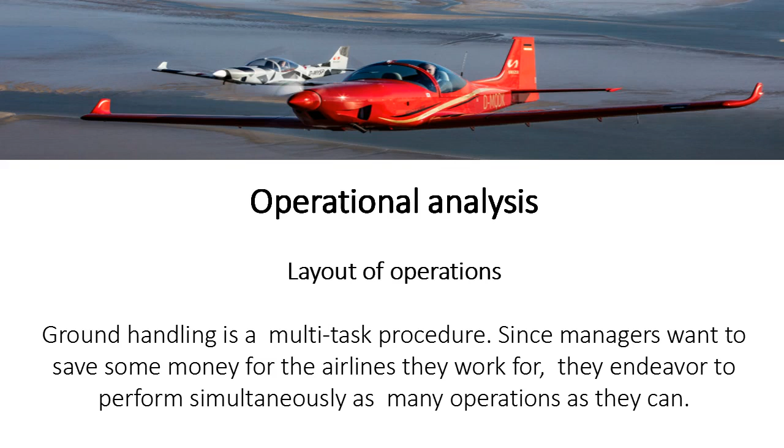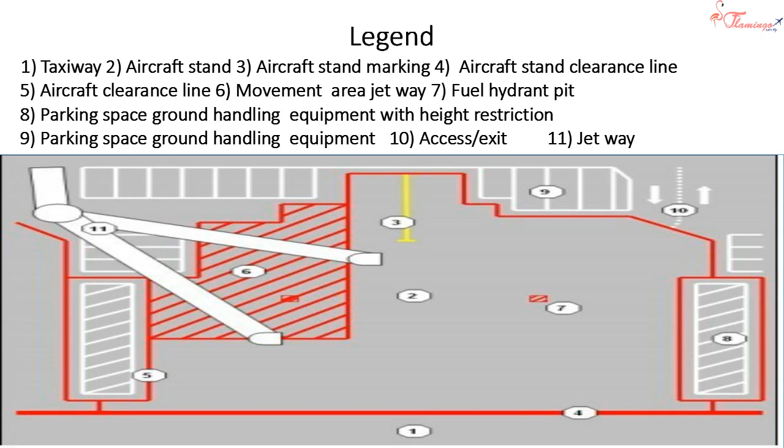Legend: 1. Taxiway, 2. Aircraft Stand, 3. Aircraft Stand Marking, 4. Aircraft Stand Clearance Line, 5. Aircraft Clearance Line, 6. Movement Area Jetway, 7. Fuel Hydrant Pit, 8. Parking Space Ground Handling Equipment with Height Restriction, 9. Parking Space Ground Handling Equipment, 10. Access, Exit, 11. Jetway.

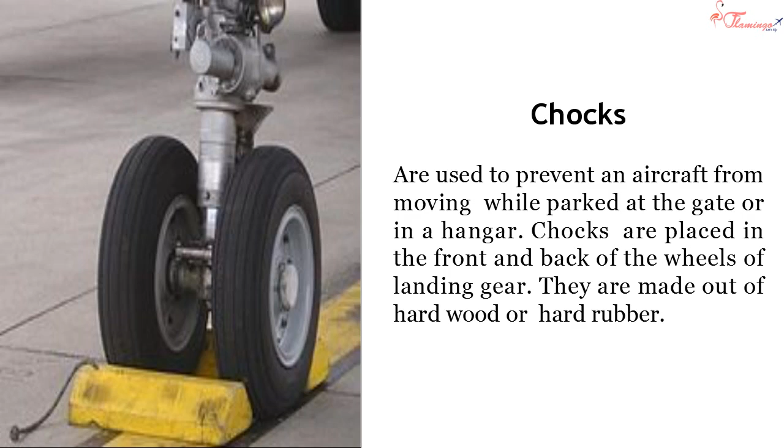Chocks are used to prevent an aircraft from moving while parked at the gate or in a hangar. Chocks are placed in the front and back of the wheels of the landing gear. They are made out of hardwood or hard rubber.

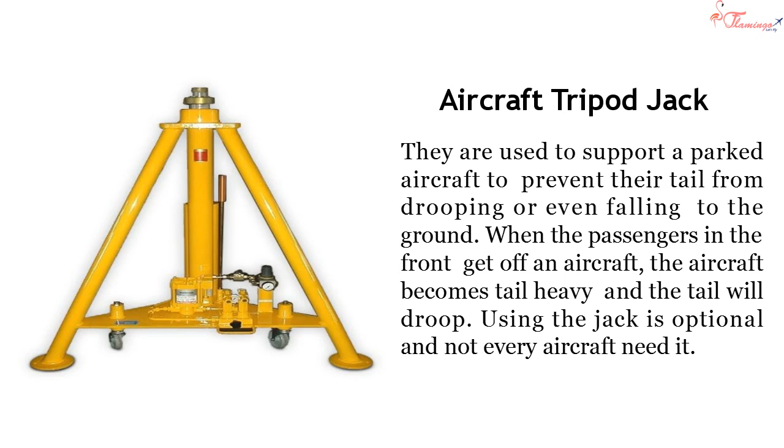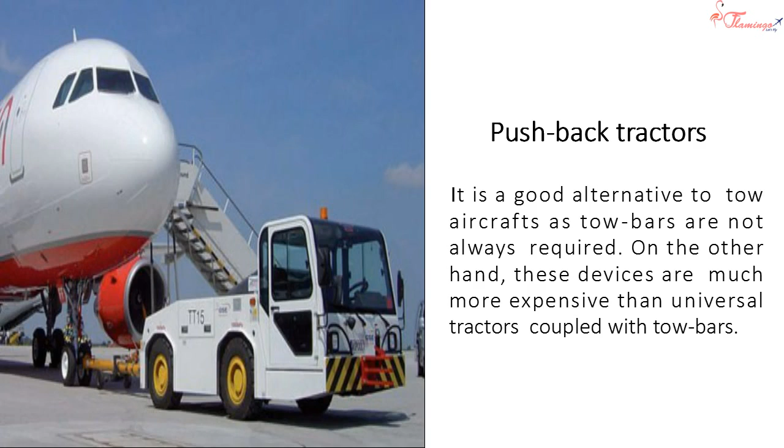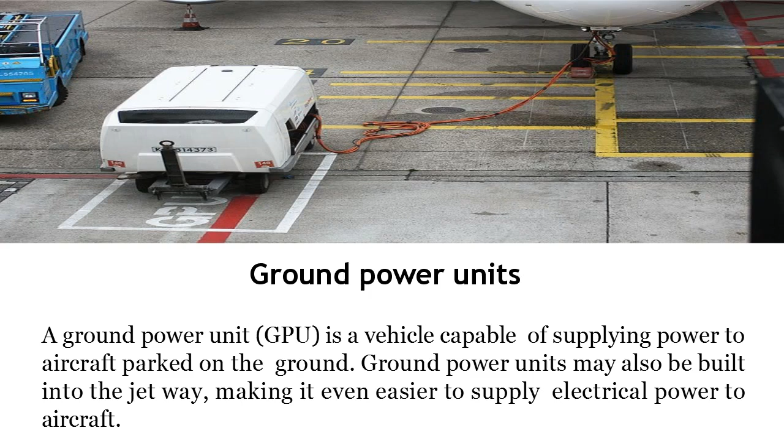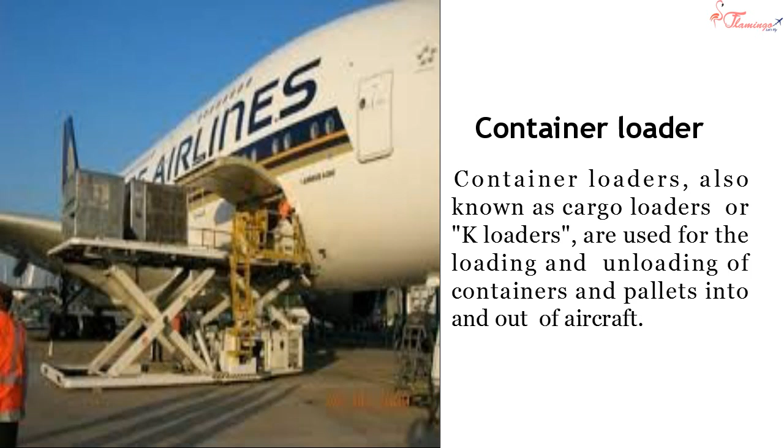Container loader. Container loaders, also known as cargo loaders or K-loaders, are used for the loading and unloading of containers and pallets into and out of aircraft.

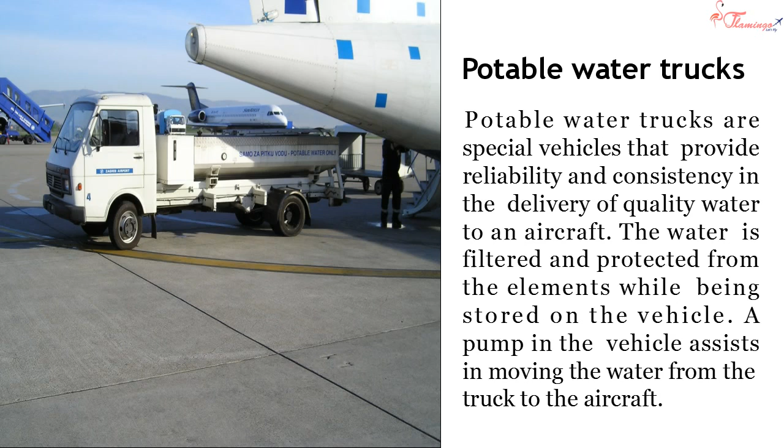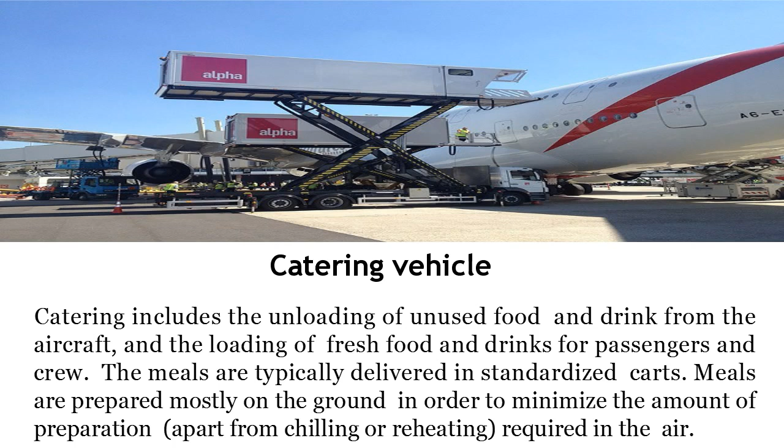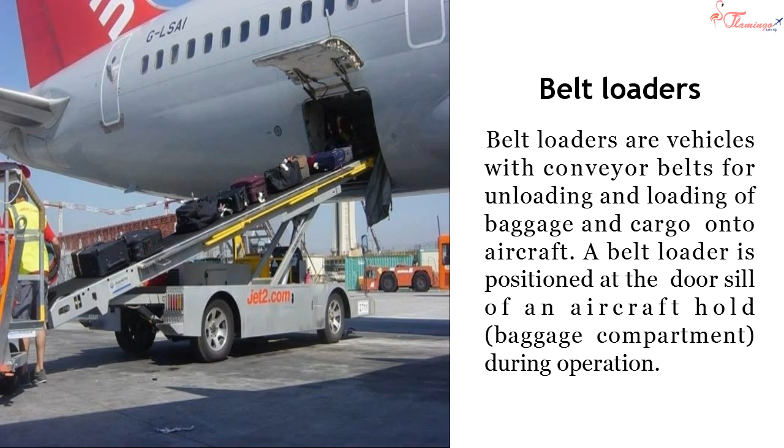Belt loaders. Belt loaders are vehicles with conveyor belts for unloading and loading of baggage and cargo onto aircraft. A belt loader is positioned at the door sill of an aircraft hold baggage compartment during operation.